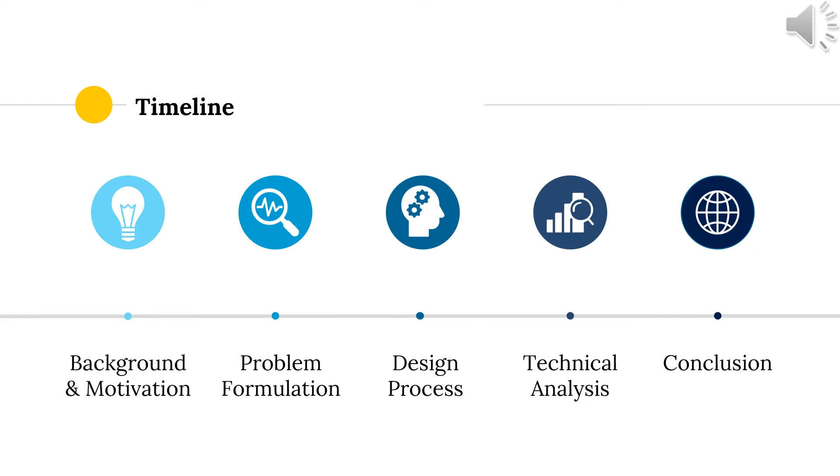The topic today is the notion of smart textiles. They are defined as textiles that can sense and react via an active control mechanism to environmental conditions or stimuli from mechanical, thermal, chemical, electrical, or magnetic sources.

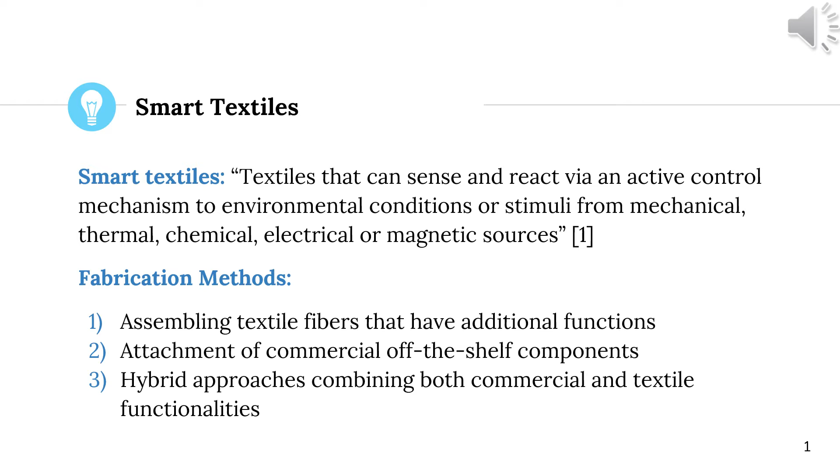Typically, smart textiles are made through various fabrication methods. 1. Assembling textile fibers that have additional functions. 2. Attachment of commercial off-the-shelf components. Or 3. Hybrid approaches combining both commercial and textile functionalities.

According to a report by Grand View Research Inc., it is expected that by 2025, the global smart textile market size will reach $5.55 billion USD. It is anticipated to witness substantial growth due to the increasing product demand from several applications such as, but not limited to, sports and fitness.

An increasingly popular application of smart textiles is wearable technology. The vision for wearable technology is that it will be integrated into the daily lives of users, as it would be able to automatically recognize the activity and behavioral statuses of users, as well as their surrounding environment. This allows the technology to use the information collected to adjust the system's configuration and functionality.

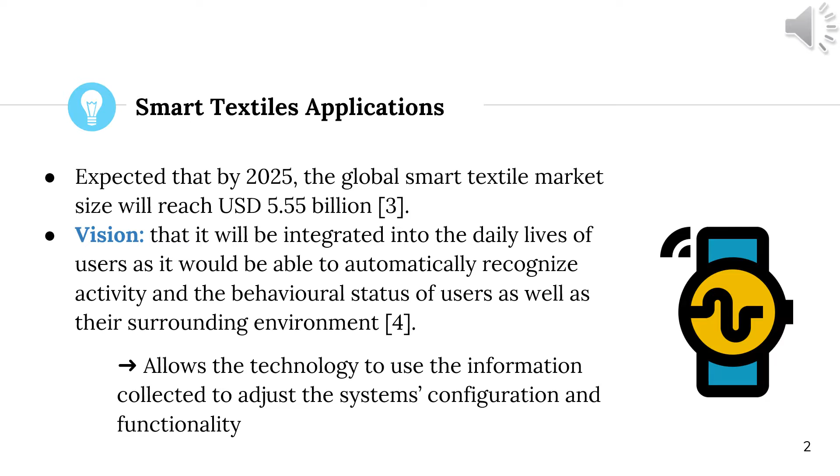So now let's go over our defined problem. Currently, the most common conductive metal found in smart textiles is steel, as it is conductive and durable but can also be made soft and flexible. However, steel is a non-renewable material, and it acts as a contaminant when attempting to recycle the textile.

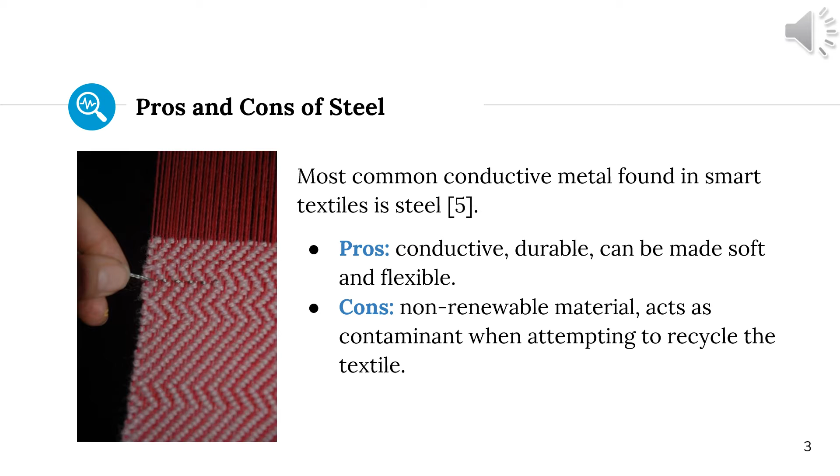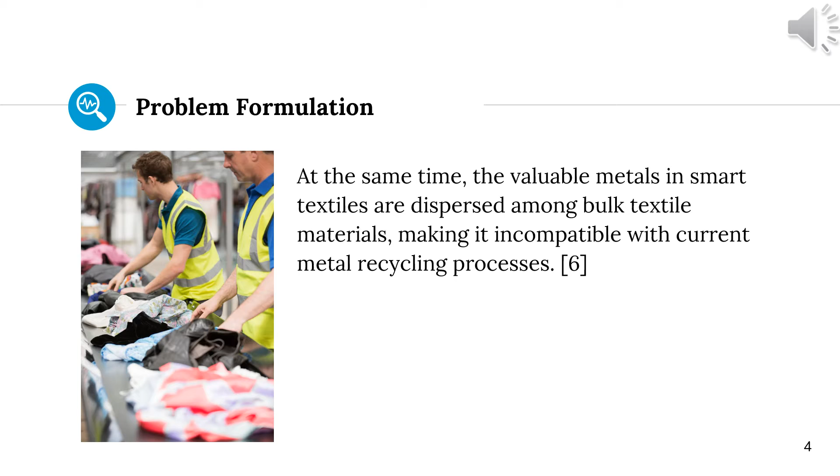Even with the increasing growth in the smart textiles industry, it has its limitations. Currently, smart textiles are woven with stainless steel yarn, silver threads, or other precious materials. However, valuable materials contained in e-textiles are dispersed within textile bulk materials, which makes e-textiles a low-grade feedstock for metal recycling. Fiber recycling, in turn, is seriously compromised by e-waste contaminating the textile materials.

Despite its increasing popularity, very little attention has been paid to how smart textiles will be managed at the end of their life. To summarize, the problem addressed in this project was that the conductive components of smart textiles are incompatible with current textile recycling processes, making the recycling of smart textiles challenging and expensive overall.

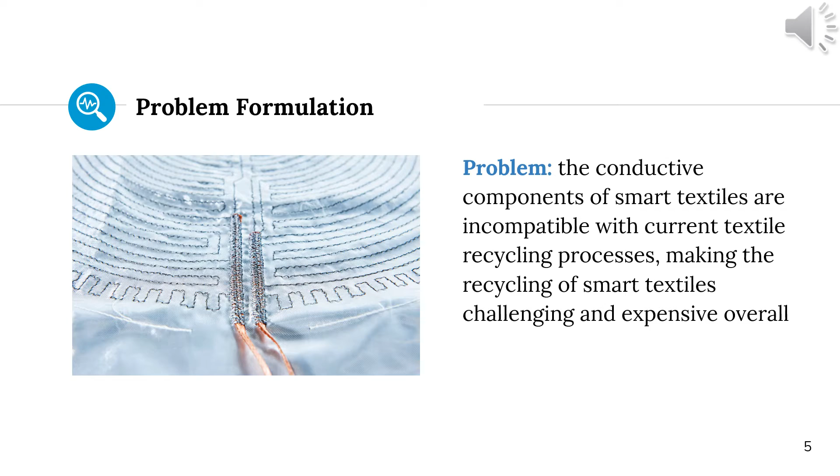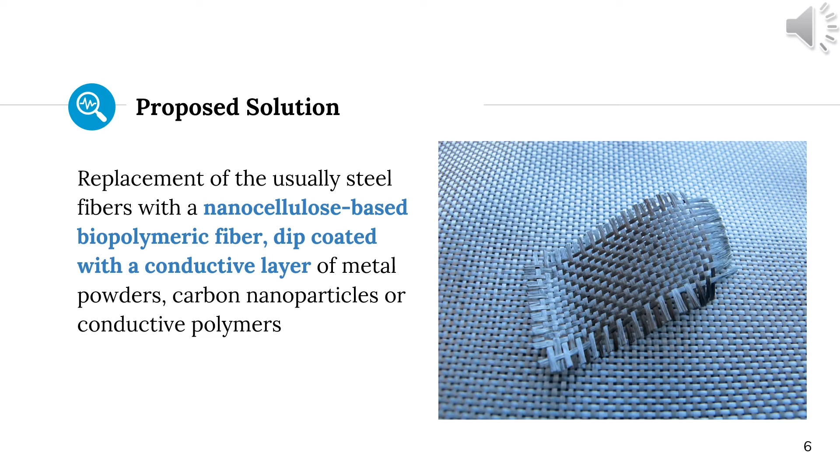The team is proposing the replacement of the usually steel fibers with a nanocellulose-based biopolymeric fiber, dip-coated with a conductive layer of metal powders, carbon nanoparticles, or conductive polymers. This will reduce the environmental costs of the manufacturing process and will result in increased sustainability in fabricating the product, as the energy costs will be lowered.

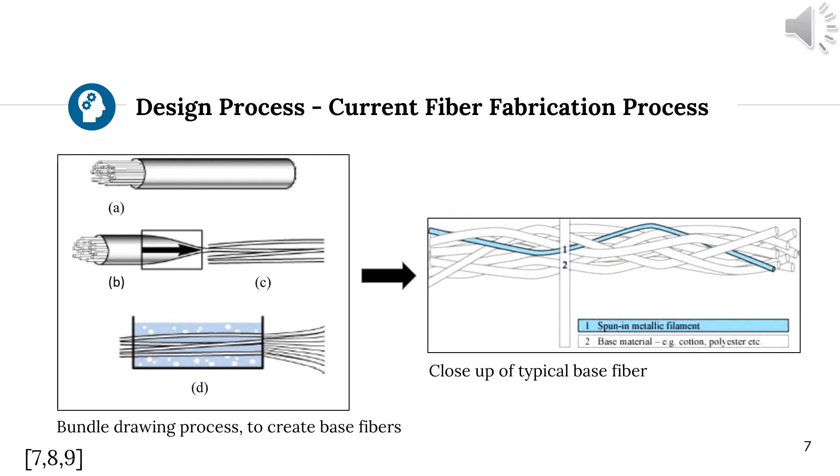Nanocellulose is created from cellulose, which can be extracted from sources such as, but not limited to, wood, cotton, hemp, flax, and wheat straw. CNFs are therefore biodegradable and renewable materials, making them highly sustainable. The creation of continuous fibers from CNFs to be used in smart textiles entails two different processes: 1. Creation of the fibers, and 2. Coating of the fibers with conductive material.

High tensile strength was not deemed a strong requirement for application in textiles. Moreover, the team believes that for the solution to be feasible, there needs to be a high throughput and a small barrier to entry, which would incentivize companies to make the switch to the more sustainable material. Therefore, melt spinning was considered the best and most feasible method for fiber fabrication due to the low initial cost, high throughput, and simple application. It also enables a shorter lead time, thus making it an attractive fabrication method for companies.

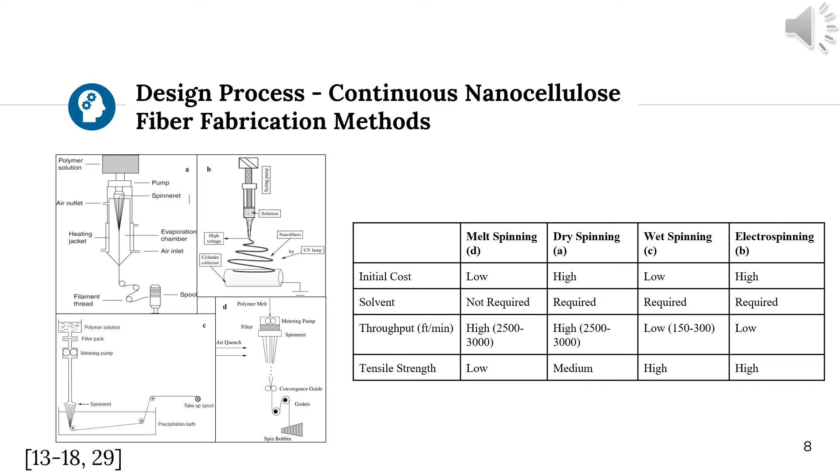Since nanocellulose has poor conductive properties, the fibers must be coated with a conductive coating with materials such as conducting polymer composites, metals, or carbon-based materials, such as carbon nanotubes, carbon nanopowders, and graphene. Some of the methods used for coating the fibers include dip coating and vapor deposition.

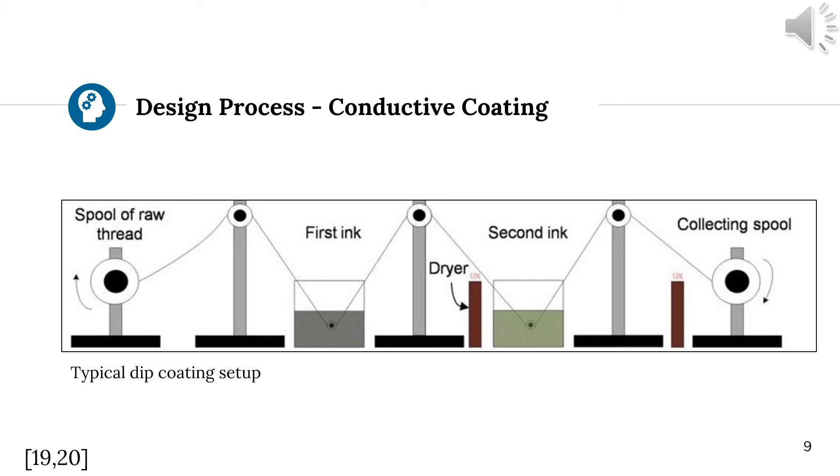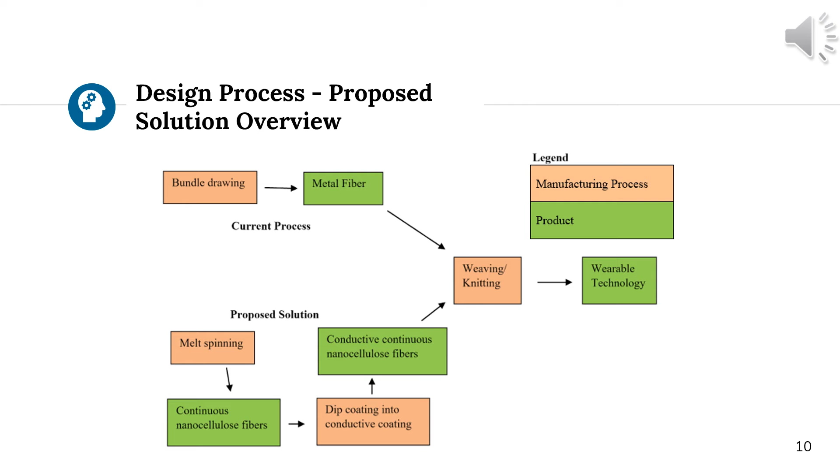A flowchart showing the proposed solution and the associated manufacturing process is shown. 1. Melt spinning to manufacture the continuous nanocellulose fibers. 2. Dip coating into a conductive coating to produce conductive continuous nanocellulose fibers. Then the current process of fabrication of metal fibers through bundle drawing. Then the conductive continuous nanocellulose fibers and metal fibers are woven and knitted, resulting in a wearable technology product.

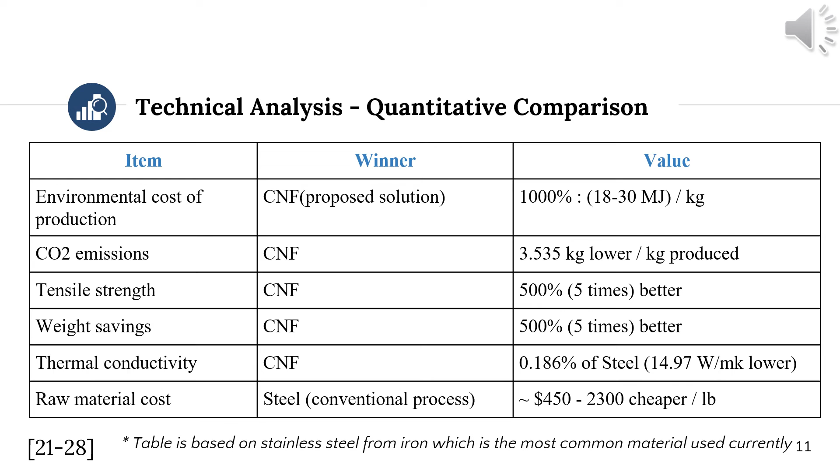costs. Moreover, smart textiles are often exposed to tensile stress, which can lead to fracture of the interwoven conducting yarns. The use of CNF would result in increased durability of the smart textile and reduced weight, which would increase the comfort for the user. When used in sizable quantities, CNF could provide insulating characteristics to the wearable technology due to its low thermal conductivity. Moreover, CNFs have good mechanical compressibility and fragility resistance.

However, despite the environmental benefits and superior mechanical properties, the cost of raw materials for the CNF is higher than for stainless steel. As cost is one of the biggest driving factors in the decision-making process in businesses, this is one of the biggest barriers to the implementation of CNFs.

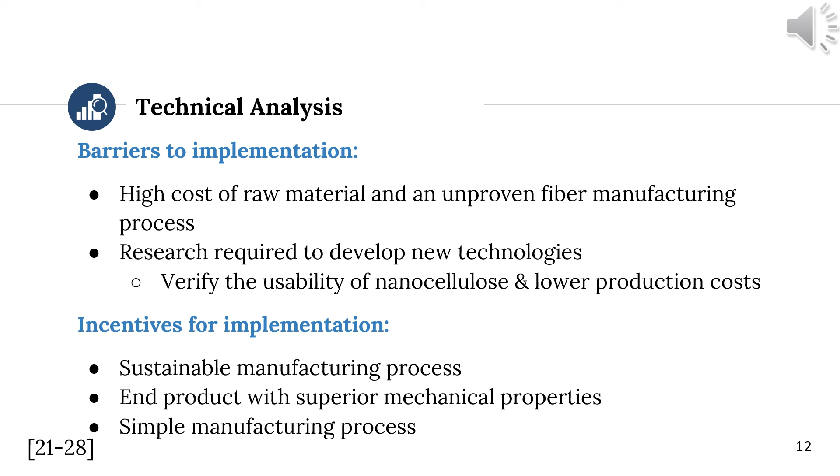When looking at disposal, recycling old e-textiles will be difficult because valuable materials are dispersed in large amounts of heterogeneous textile waste. Moreover, the electronic components can act as contaminants in the recycling of textile materials. Therefore, if the textile itself is also made of biodegradable fibers, the integration of CNF means that the product could still be decomposed. Moreover, this would also provide easier recycling of the smart textile as it reduces the chances of contamination during recycling and downcycling.

However, CNFs also have higher water absorptivity, which leads to swelling and a degradation in mechanical properties. Due to the electrical nature of wearable technology and the high absorption of fabric, the team is predicting that water absorption will not be a major issue.

Another potential downfall in the integration of CNF into smart textiles is due to the additional manufacturing process in conductive nanocellulose fiber manufacturing. However, due to the simplicity and low initial costs related to the processes, the barrier to implement the proposed solution is quite low given the verification of the validity and the success of the proposed methods.

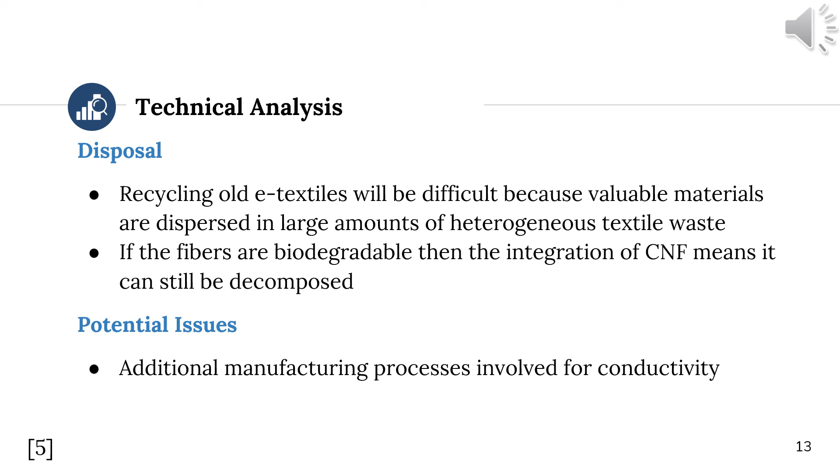In conclusion, more work can be done in looking into the feasibility of continuous fiber manufacturing. We would need to test the fabrication of nanocellulose using melt spinning to determine its mechanical properties, especially the temperature range required for extrusion so that no thermal degradation takes place. In addition, testing for coating materials of the organic material needs to take place to maximize factors like conductivity and bond strength as well as minimize costs.

Cost will likely be the driver for much of the viability of this idea. Thus, sufficient testing should take place to minimize costs of production in general before the use of nanocellulose fibers becomes a viable and marketable option for textile producers. Other ways to minimize costs include integrating manufacturing of nanocellulose with other polymers to make use of current manufacturing processes instead of creating brand new ones. Integration is no easy feat, but work can be done to look into this.

Overall, the use of nanocellulose fibers in textile fibers themselves has massive ramifications for recyclability and sustainability of materials. If more work can be done in reducing costs of production and cost of materials, the future of smart textiles looks bright indeed.